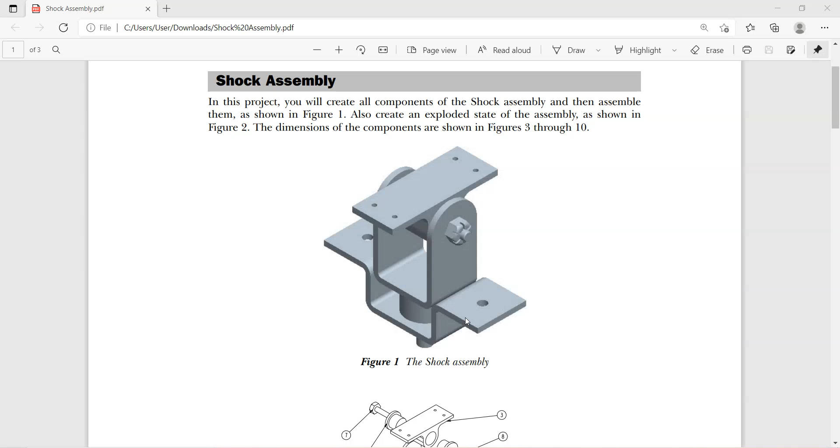We are going to make this U support pin, and you can see here this is the U support pin in the shock assembly. This is the shock assembly and this is the U pin. So we are going to make this part first, half part actually. So we can use the mirror option to mirror it, and after that we will use this pocket command to remove the extra part of this material.

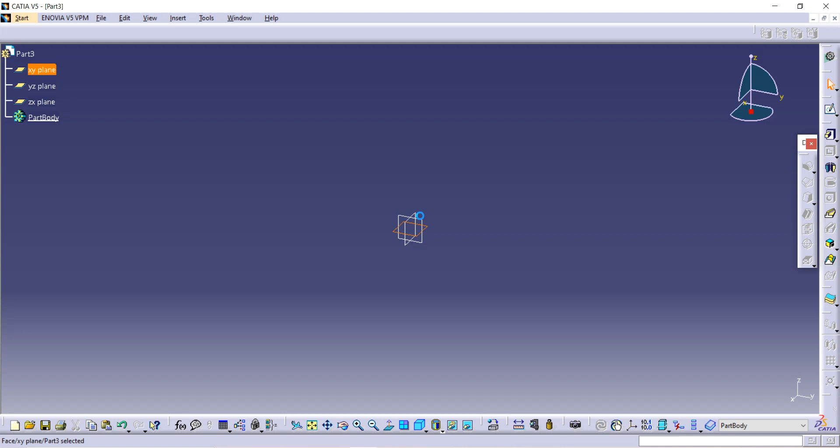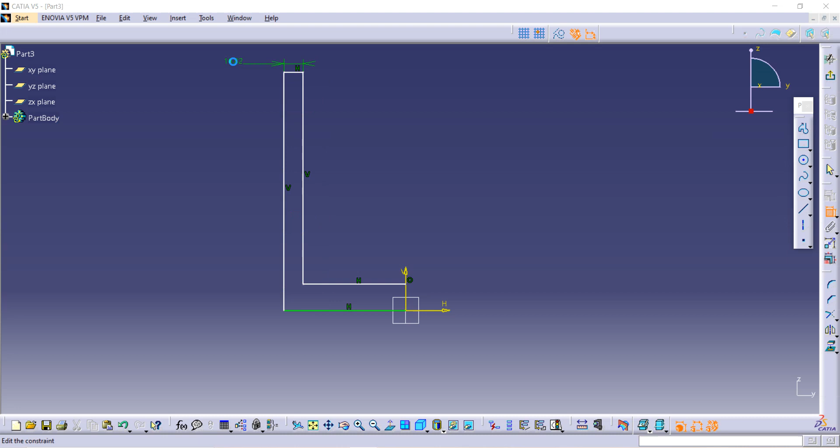Now let's start it. Select plane and then go on exit to workbench. After that use this line to make... now use this constraint option to give dimensions to it. Dimension between these two is 30 as it is given, and this to this is 30.

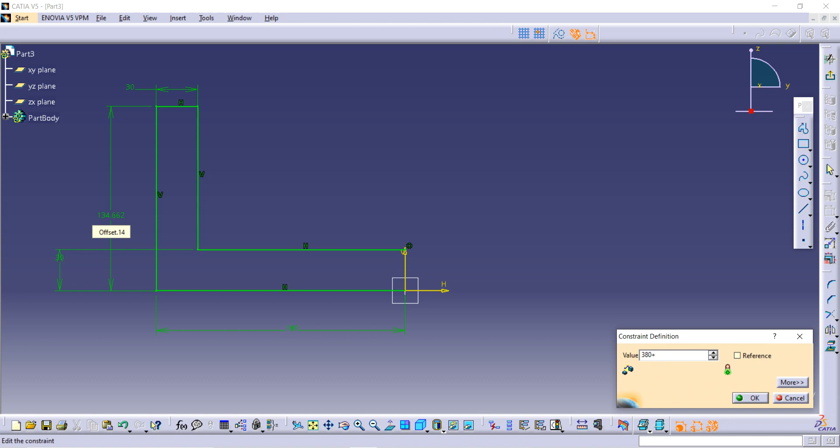After that, distance between this line to this axis is given as 360 divided by 2, because we are just going to make half. So this is 360 divided by 2, and distance between that line to this line is given as 380 plus 140, and enter it. After that we have completed our sketch because it is in green color.

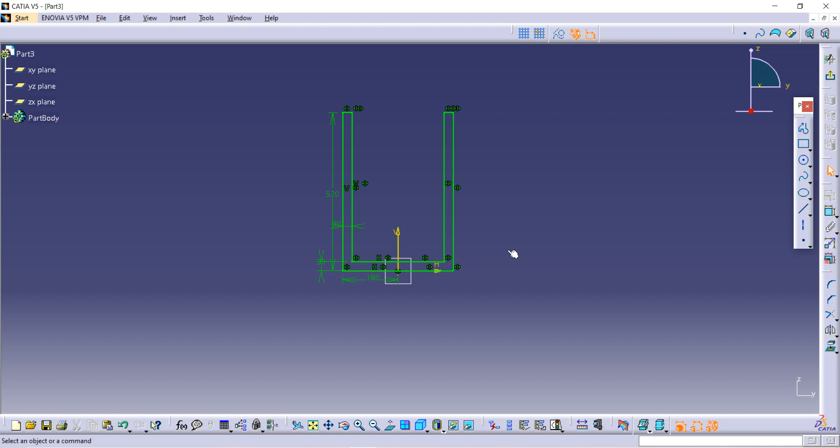Now select all the lines, and remaining lines must be selected by using the control option. After that use this mirror command, select this axis, and just after that go on exit to workbench. Now use this pad command to extend it. First select this mirrored extent, so we will get similar extension to both sides of this center plane.

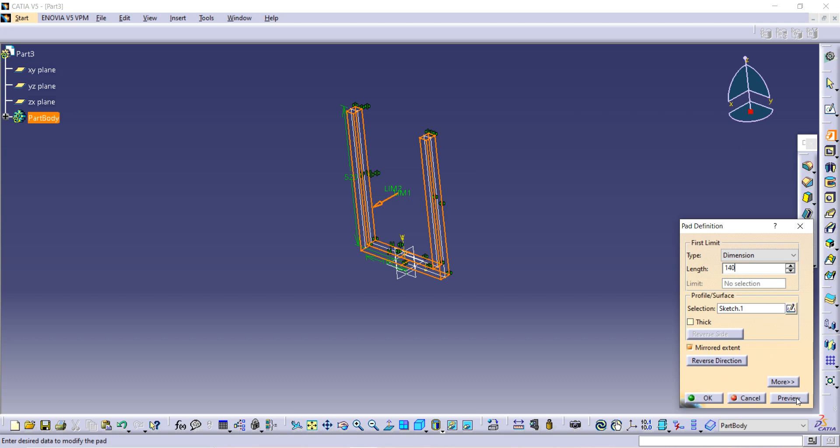The given length of this is how much? It is 140. 140 multiplied by 2. So we are just going to use 140 because it will extend it in one side, and 140 again it will extend in this side. Make preview and then OK. After that, now use this chamfer command.

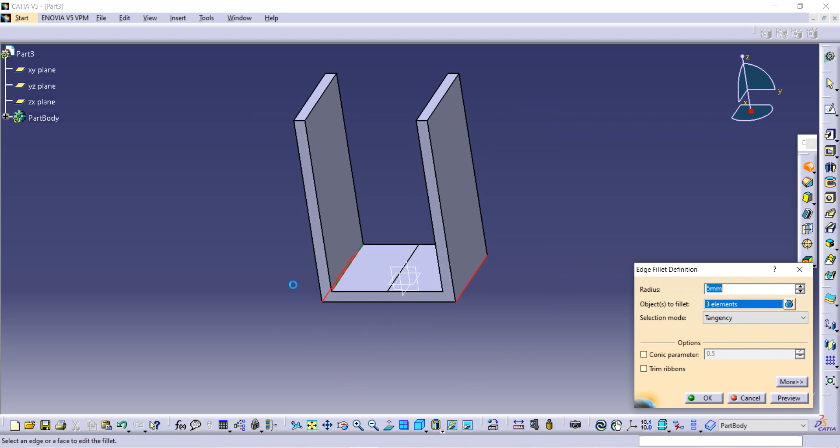Where is this chamfer? This chamfer command, edge fillet command, to give fillet here, this plane, this axis, similarly this axis and this axis. We have selected the 3 elements that are showing in this column, and the given radius is of...

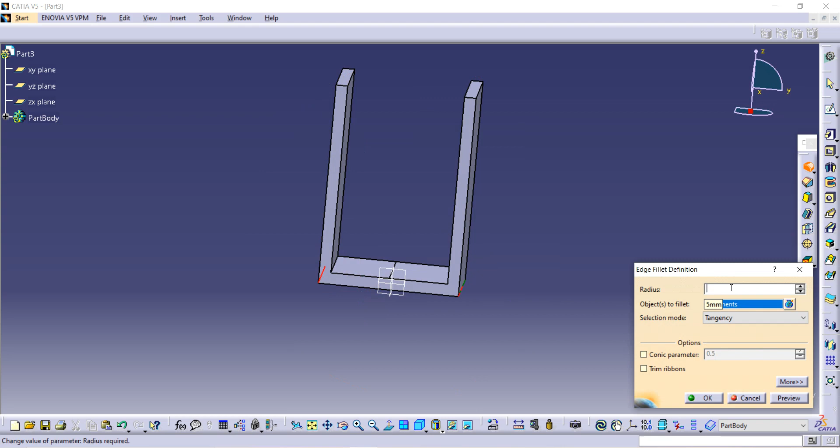First select this. Both radii are different, so select first the outer elements, and radius of that is 50, and radius of this inner part is 20. So again selecting this fillet edge, first one, second one, and here is 20 radius. This is how we have completed our half part.

Now we are going to make this circle. So select this plane, then go on exit to workbench, sketch option, then make one circle here. Now give constraints of diameter 75. After that go on exit to workbench. Now use this pad command, and given length is 325, and enter it.

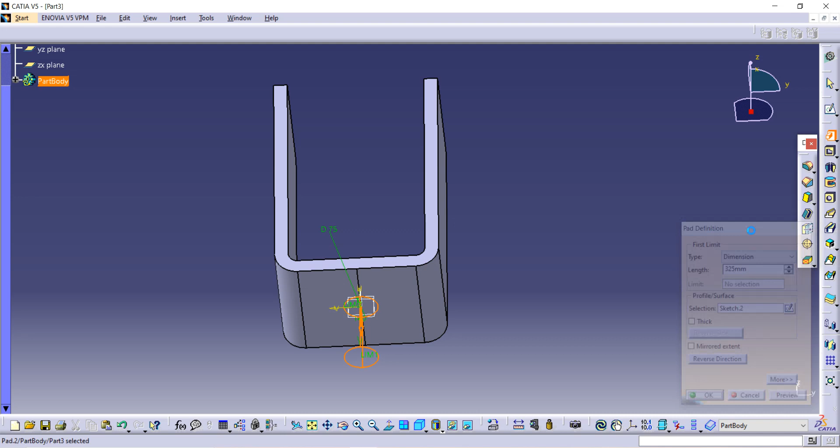Now we have to remove this extra material. You can see here, wait a second, you can see here we have extra material of this part, so we have to remove it. Let's remove it. Now first select this plane, then go on sketch option. After that select this circle command, you can select this 3 tangent circle.

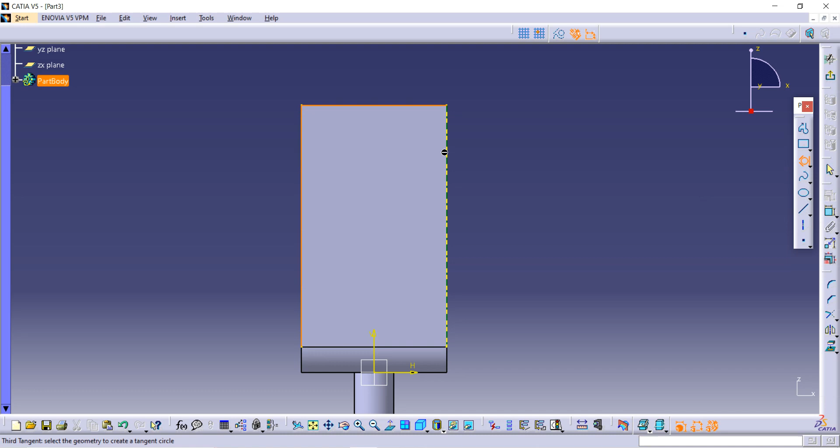So first we have to use this projection command, so we can project 3 lines, first one, second one and third one. After that use this, select first line, select second line and then select third line. Circle is created automatically here. After that we have to make one more circle. You can see here is one more circle of diameter 50.

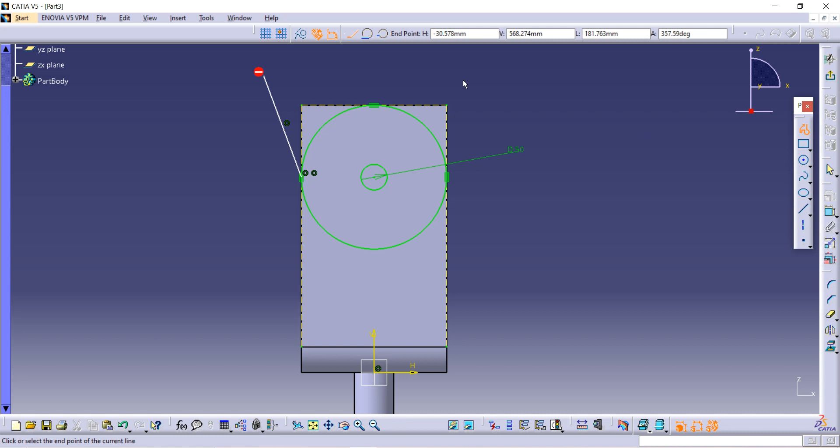So again selecting circle of diameter 50, again constraint, then 50, and now first go on this eraser option like trim. Select this line and this and all. Just trim all lines and select this option and just make one closed entity, so we can remove extra material.

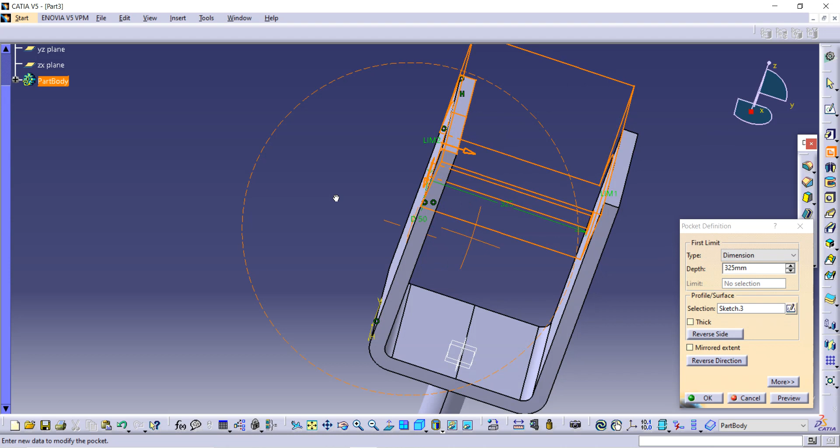And now use again this trim option to trim this part, and after that go on exit to workbench, then use this pocket command, and we want it up to last, and then take one preview. You can see the part is removed, then click on OK. This is how we have completed our sketch.